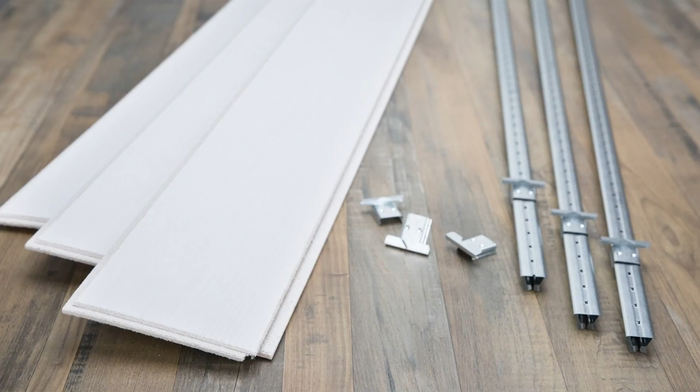This video explains how to install 480 Country Classic planks with the Easy Up track and clip system. The Easy Up track and clips are not included in the plank carton and will need to be purchased separately. Please pause the video here to review the additional hardware and tools you'll need for this installation. Keep these requirements in mind before beginning your project.

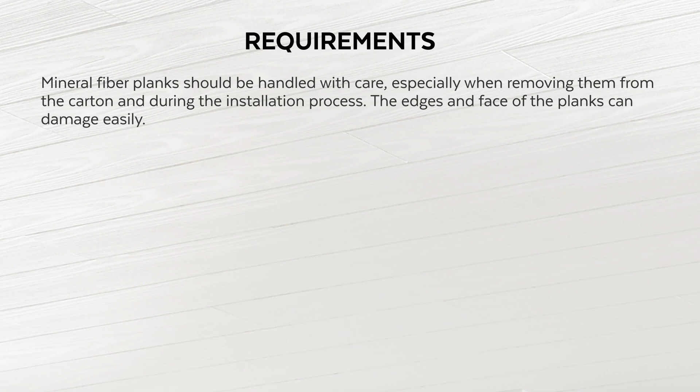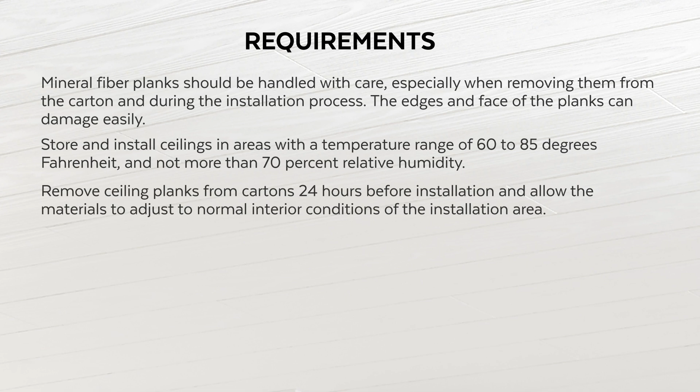Mineral fiber planks should be handled with care, especially when removing them from the carton and during the installation process. The edges and face of the planks can damage easily. Store and install ceilings in areas with a temperature range of 60 to 85 degrees Fahrenheit and not more than 70% relative humidity. Remove ceiling planks from the cartons 24 hours before installation and allow the materials to adjust to normal interior conditions of the installation area.

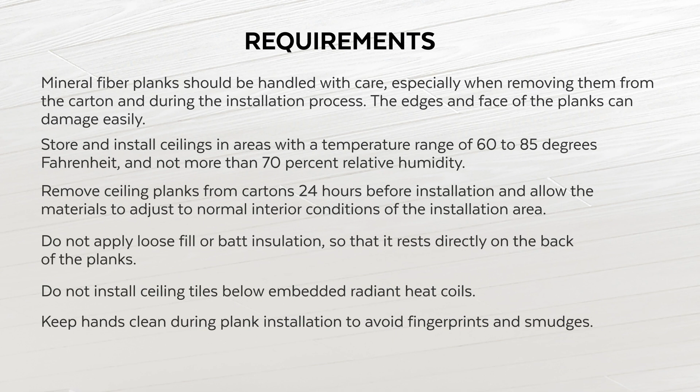Do not apply loose fill or rest batt insulation on the back of the planks. Do not install ceiling tiles below embedded radiant heat coils. Keep hands clean during plank installation to avoid fingerprints and smudges. Always cut planks face up with a sharp utility knife.

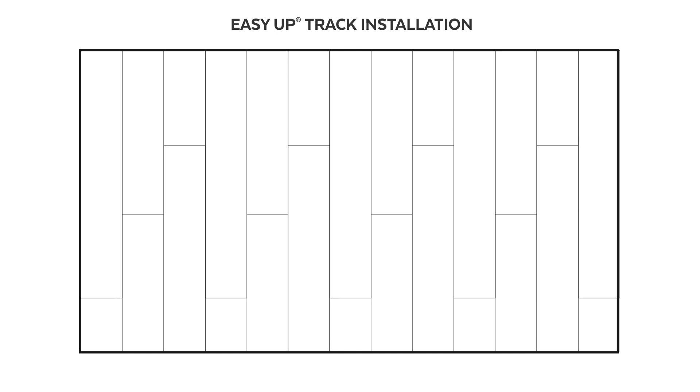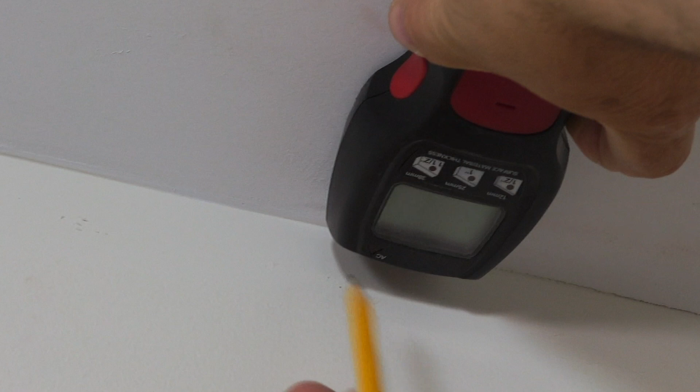Easy Up tracks should be installed perpendicular to the joists in a ceiling, so the planks run parallel to the joists. If the planks must run perpendicular to the joists, you will need to install a layer of furring strips below the joists. If installing the planks over a drywall ceiling, start by locating the hidden joists. Use either a stud finder or tap on the ceiling until you hear a solid thud. Mark either end of the joist and connect these marks with a chalk line. Joists are typically spaced 16 inches or 24 inches on center.

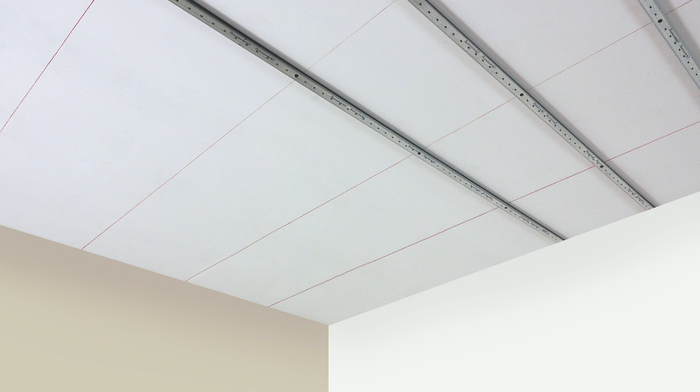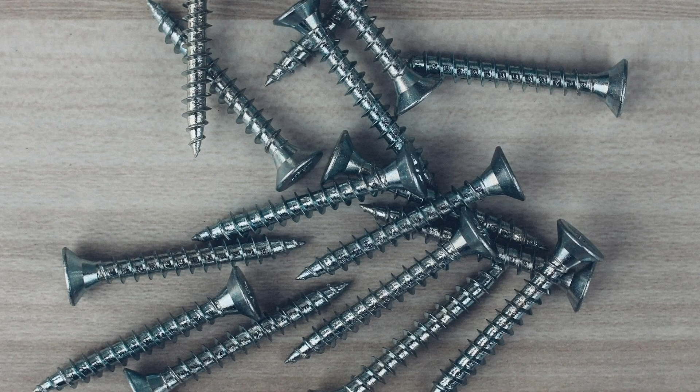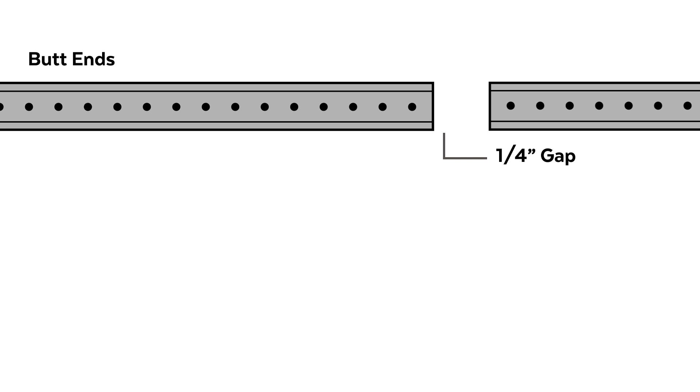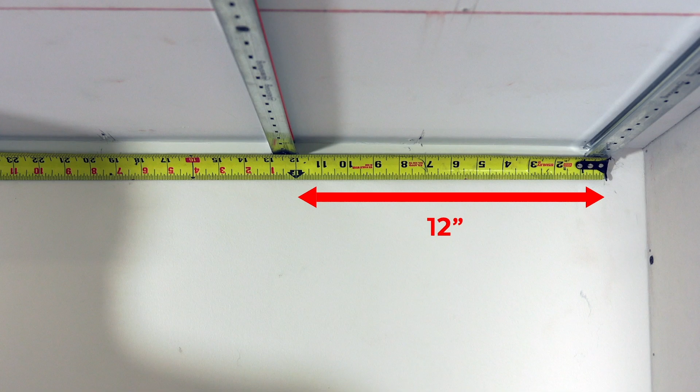Next, install the second row of the track. Measure 12 inches out from the first row. Snap a chalk line running parallel to the first row. The edge of the second row of track that is farthest from the starting wall should run along this chalk line. With the first 2 rows of track installed, continue installing the remaining rows 12 inches on center. The last row of the track should be installed 2 inches from the wall.

Now that the track is installed, you can calculate the size of the border tiles. Use the following example to help you complete these calculations. First, measure your room length in the same direction as the track. Then divide that number by 6. Multiply the remainder decimal by 6, and then add 6 to the result. Divide that result by 2 to get the border plank size for either side of the room. Plan the plank layout and border plank sizes. Pause the video here to review the formula that will help you determine the border plank width. Keeping border planks symmetrical and as large as possible will create the best finished visual.

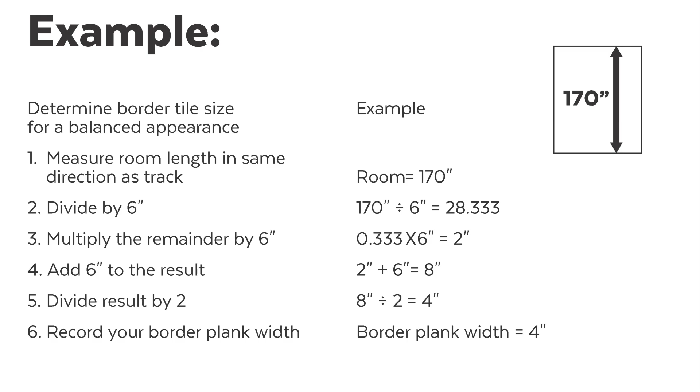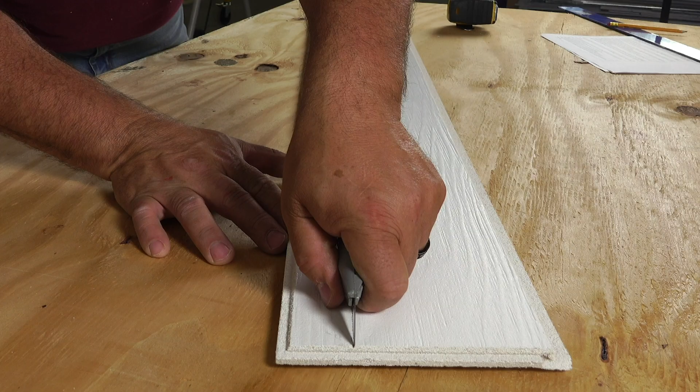With border calculations done, it is time to cut the first row of planks. Familiarize yourself with the plank edges and face before you begin cutting your first plank. Carefully trim the first plank to the calculated border plank width, face up with a sharp utility knife. Do not cut off the flange sides of the plank. Next, cut off the tongue on the narrow edge of the first plank.

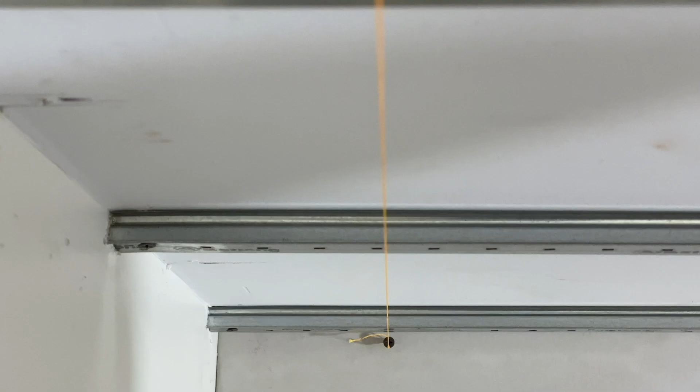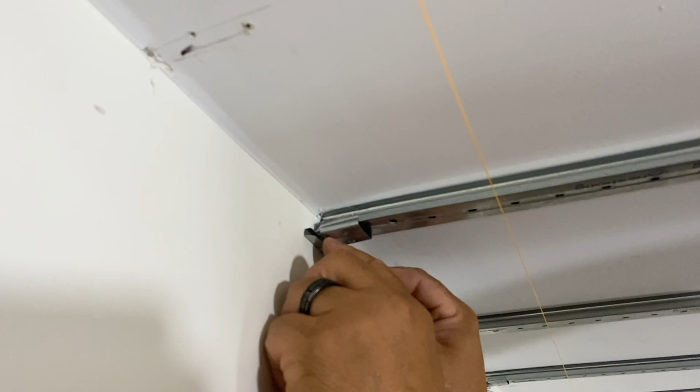Before installing the first plank, we recommend hanging a string line that equals your border plank width away from the wall. You will also want to install the first row of clips on every track with teeth facing away from the front wall. Snap the clips into the track and push the clips flush against the wall. Push the first plank firmly into the corner, embedding the clips into the cut edge. Keep a 1/2 inch gap between the short edge of the plank and the wall.

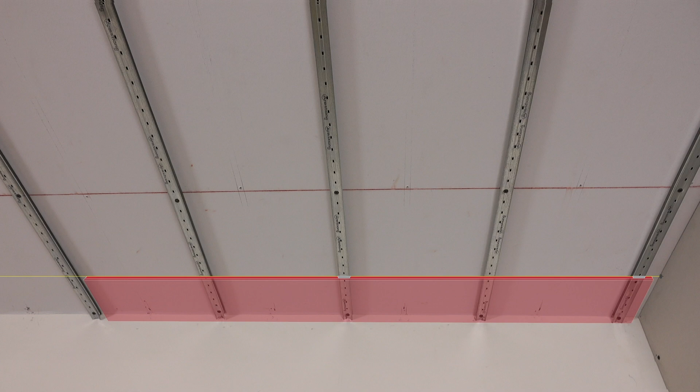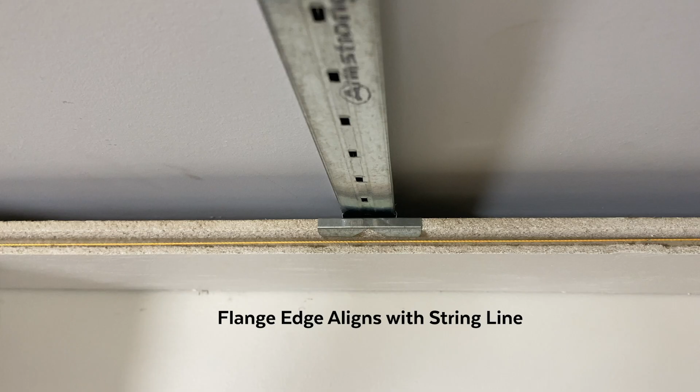Next, snap a new clip on every other track and push them over the plank flange to secure the plank's flange side. Lightly tap the clips with a hammer to seat the plank tightly to the front wall. Make sure the plank flange edge aligns with the string line. Complete the first row of cut planks. Cut the last plank to length.

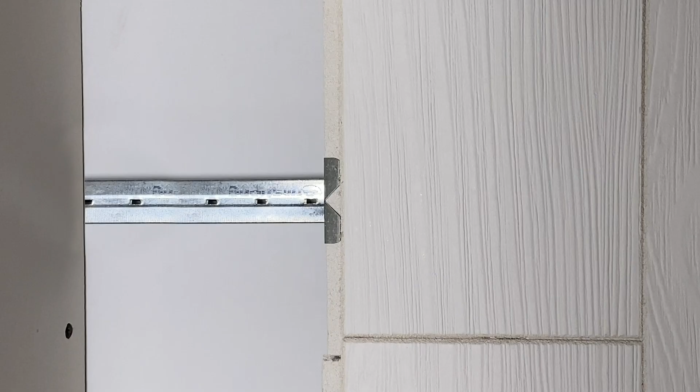When starting the second row, cut some length from the first plank to stagger the seams. To maintain staggered seams from row to row, use the remaining material cut from the last plank in the previous row to start the next row. Place a clip on every other track to secure the plank flanges. Clips must alternate tracks on every row and not be farther than 24 inches apart.

Snap a clip onto each track before inserting the last row of planks, and push flush with the end wall. Cut the last row of planks a 1/2 inch short of the end wall. Measure and cut the face of the plank. Install end wall border planks and use a screwdriver next to the wall to embed the clip into the plank's cut edge.

The last step is covering the expansion gaps around the ceiling with a trim of your choice. We recommend painting or staining the trim before installing and nailing it into studs every 24 inches. A full set of installation instructions is available on our website. For additional installation support, contact our TechLine team with questions.